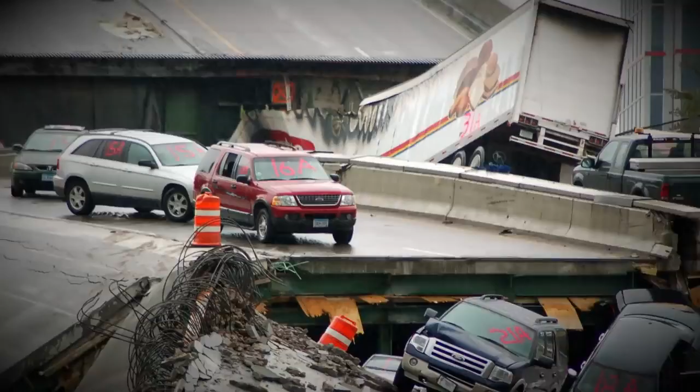Today we're covering the Mississippi Bridge collapse, and as such I'm going to rate it here 6 on my disaster scale, and again here 6 on my historical legacy scale.

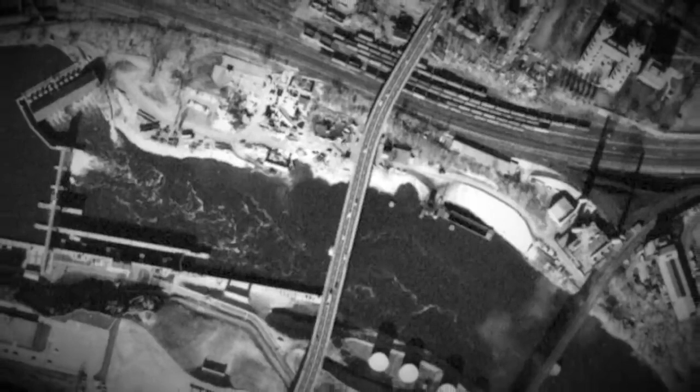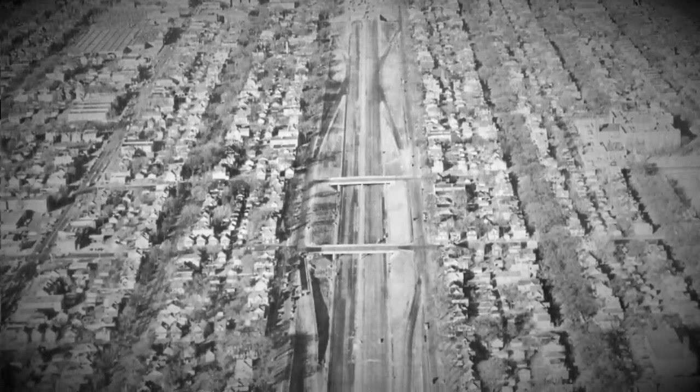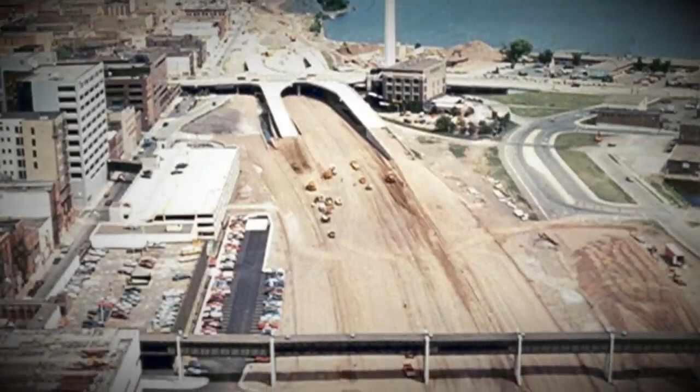In the early 1960s, plans were drawn up to cross the Mississippi River as part of the colossal construction of the I-35, a monumental 1,569-mile north-south cross-country interstate highway project. Parts of what would become the I-35 had been constructed pre-1956, the date on which the interstate system was formed in the US. The route would eventually be completed in 1982, and it ran from Minnesota in the north all the way down to Texas in the south.

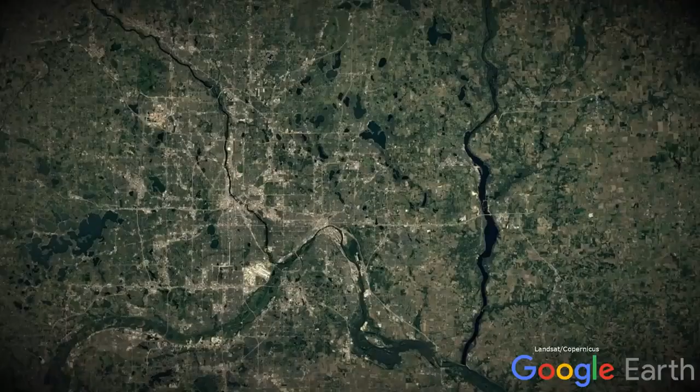And part of the route would have to travel through Minneapolis, necessitating the crossing of the Mississippi River. As a side, the I-35 in the region actually splits into 2, the I-35 West and the I-35 East. This allowed the highway to be brought into Minneapolis and St. Paul respectively. Both branches rejoined in Columbus. In 1962, plans were begun to be put on paper on the I-35 West River crossing.

As part of the design process, engineering firm Sverdrup and Parcel were hired on to produce a preliminary engineering report, create final design plans, checked by a registered professional engineer, and check design computations. On the 12th of April 1963, 2 options were presented to the Minnesota Department of Transport, a 4 and a 2 truss design. Sverdrup and Parcel recommended the latter for economic reasons, which was the option selected by the department.

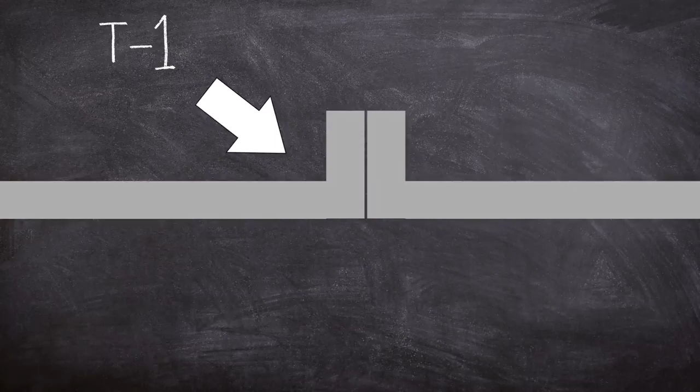The accompanying report from Sverdrup and Parcel stated welding is planned throughout for the makeup of girders and truss members, and, in this connection, high yield strength steel conforming to T1 will be used extensively. They also commented that the use of welding compared to riveting would save the department money, but in reality the use of T1 steel had an overall cost implication. By September, both Minnesota Department of Transport and the Federal Highways Administration began to express reservations about using such large quantities of T1 steel in the bridge.

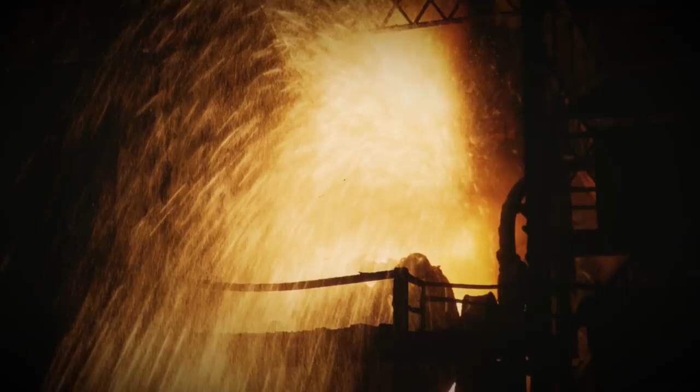You see, T1 is a very strong construction material, but this comes with a drawback: the way it is heat treated. And as such, members made of T1 are limited by the size of the heat treatment facilities where they are produced. This meant that there would be a need for more joints, which incurred extra cost during construction. Not only that, but the material was more expensive compared to other steel types at the time. T1 was 38 cents per pound, compared to the weaker A441 steel that was around 31 cents per pound, and could be made in longer sections due to the different heat treatment processes.

During the March 1964 conference, Minnesota Department of Transport and the Federal Highways Administration decided that Sverdrup and Parcel eliminate T1 steel from all main truss members and use A441 and A242 steels instead. This required a redesign, as the A441 and A242 steel had a capacity of 27,000 pounds per square inch versus 45,000 pounds per square inch for T1. Due to the weaker steel, the design had to be replanned and required thicker steel, which in turn added more deadweight to the structure.

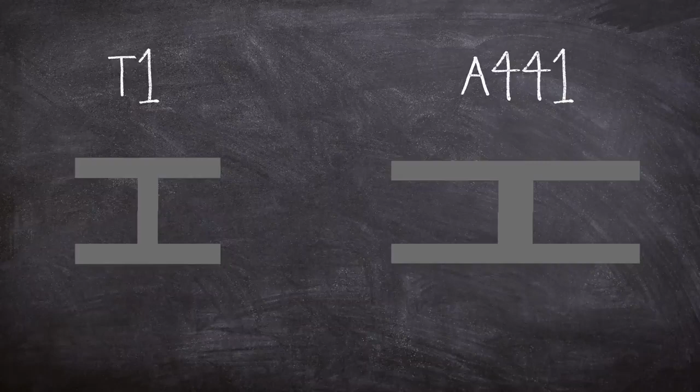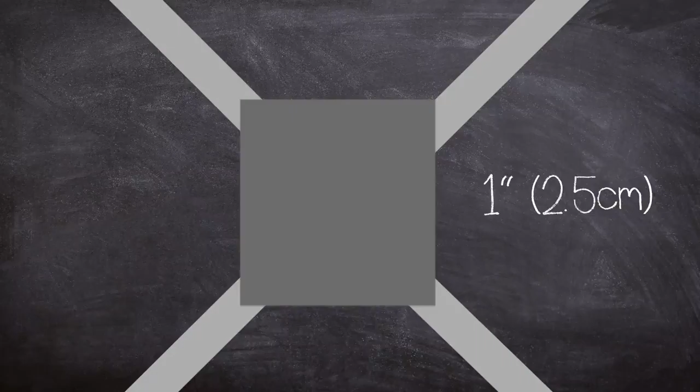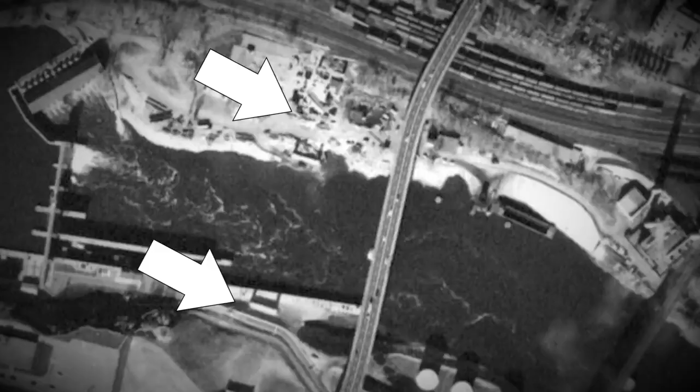However, some of the original 0.5-inch T1 steel gussets weren't thickened when the change to weaker steel was employed. The ones that were improved in the final design were up to 1 inch thick, and it might be worthwhile remembering this for later on. The final design was settled upon by March 1965. However, initial works to build the piers had already started in 1964. Let's first look at the actual design accepted.

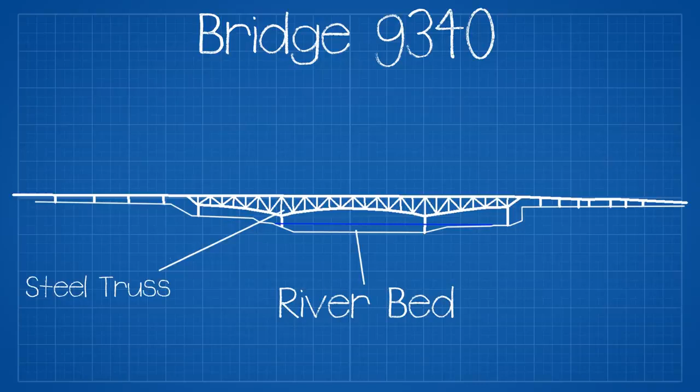The structure used welded built-up steel beams for girders and truss members, with riveted and bolted connections. The bridge was 1,907 feet long and carried 8 lanes of traffic, 4 northbound and 4 southbound. The bridge had 13 reinforced concrete piers and 14 spans, numbered south to north.

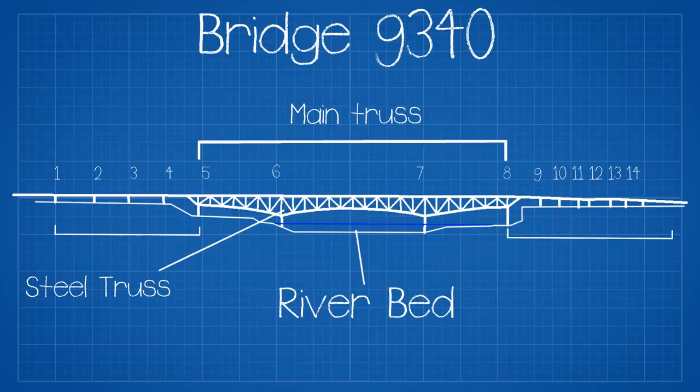11 of the 14 spans were approach spans to the deck truss portion, which was only 3 spans long but was over 1,000 feet in length. The bridge deck in the approach spans was supported by continuous welded steel plate girders or by continuous voided slab construction. The 3 main spans used deck truss construction, consisting of 2 reinforced concrete deck slabs separated by about 6 inches, with a total width of the deck slabs of about 113 feet 4 inches. This was enough to accommodate all 8 lanes of traffic.

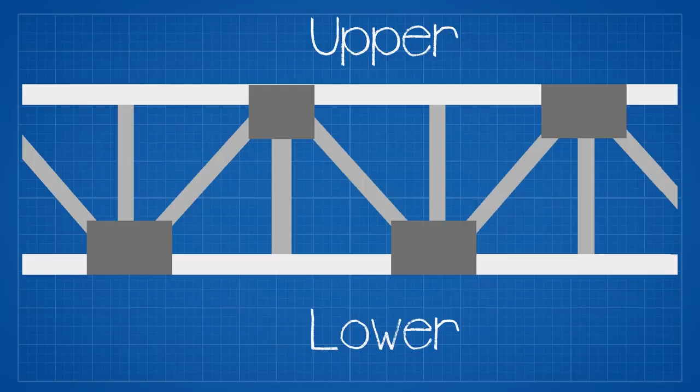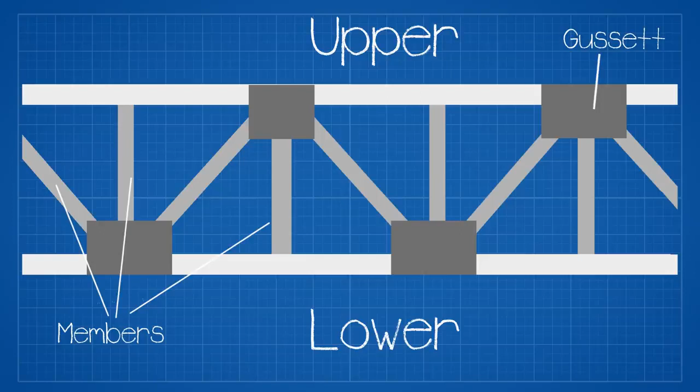The main trusses comprised 2 parallel main sections. This was made up of upper and lower chords that extended the length of the deck truss portion of the bridge. For added strength, the chords were connected by straight, vertical and diagonal members. To connect these together at each junction, gusset plates were installed and riveted together. These were made of steel. To connect the east and west trusses, bracing members were utilised.

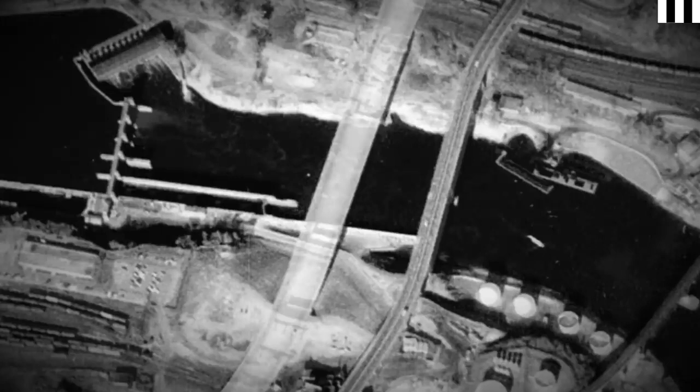Construction was completed in 1967 and opened to traffic, and for 10 years or so all seemed well, until it reached its first renovation in 1977. Back in 1967, when the bridge was initially constructed, it had 1.5 inches of concrete over the uncoated top reinforcing bars of the bridge deck. This was pretty standard for the time, but by the 1970s a number of similar structures were experiencing rebar corrosion.

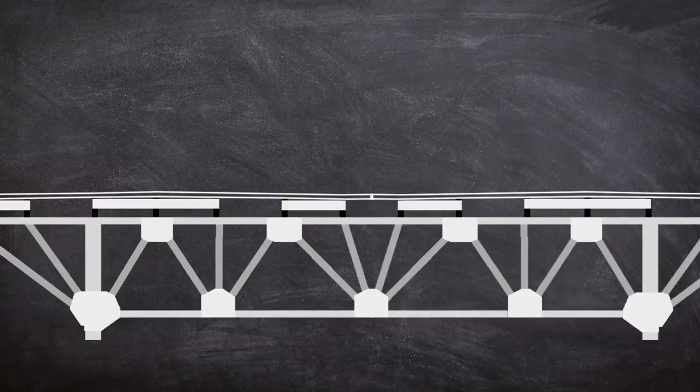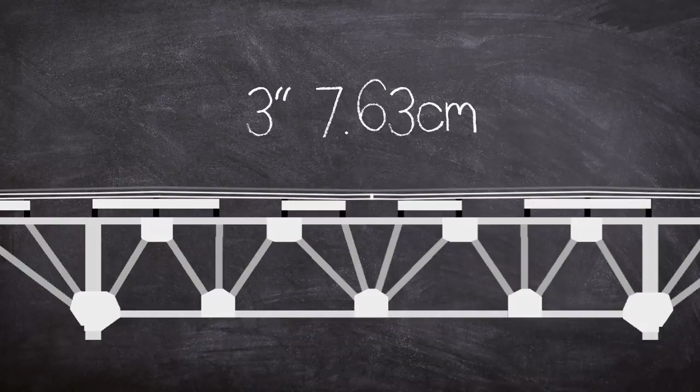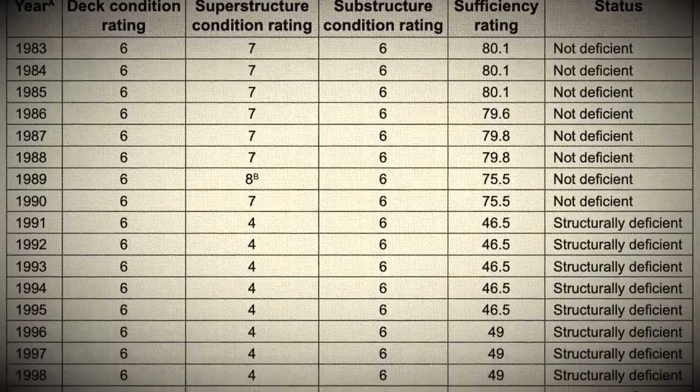In order to combat this, a thicker layer of concrete was poured on top of the bridge, bringing the total thickness to 3 inches. But this came with an issue, and that was the increase in weight on the truss structure, in the region of roughly 3 million pounds or 13.4%. All throughout the bridge's life, the structure received an annual inspection, starting in 1971. Part of these inspections were a general condition and evaluation report, but after 1991, the results took a nosedive.

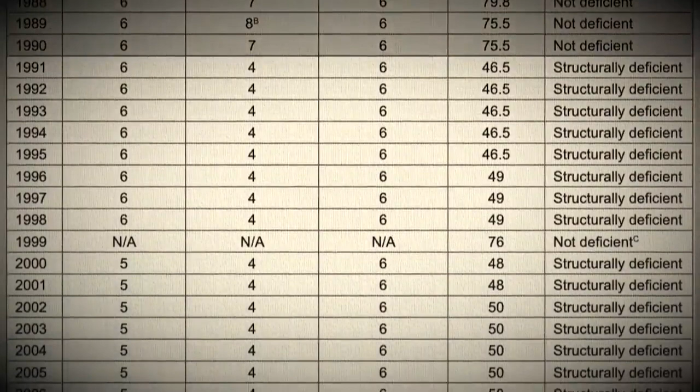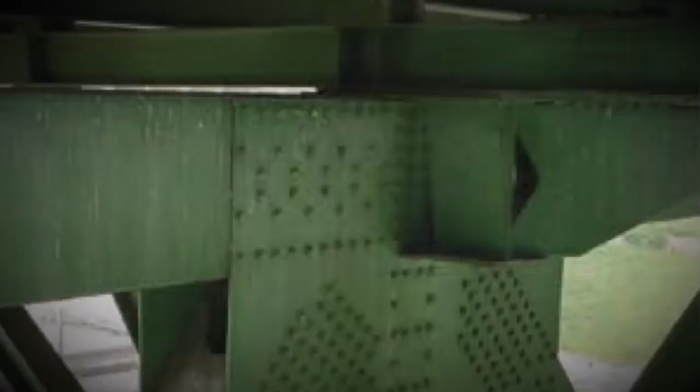As part of the annual survey, the bridge is given a status, and at the start of the 1990s, it received an unsatisfactory structural deficiency rating. A status does not indicate that a bridge is unsafe, but only that the structure is in need of maintenance, repair or eventual rehabilitation, and as such, a weight restriction is given. However, in 1993, some gusset plates had experienced corrosion.

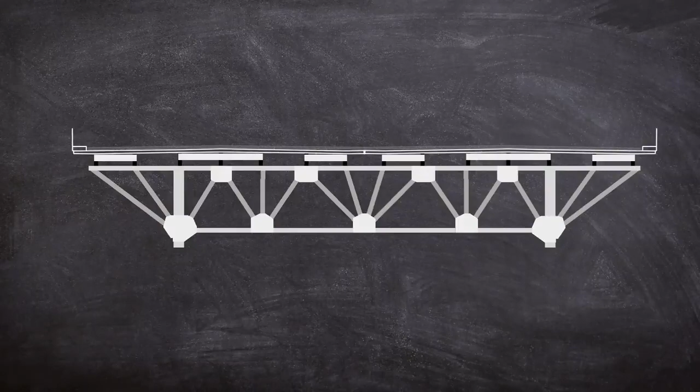In 1998, another refurbishment project was underway at the bridge. This involved improving several features, including the central barrier and outside traffic railings, which did not meet the then safety standards. And like in 1977, the permanent changes increased the dead load on the bridge by about 1.13 million pounds, or 6.1%. In the early 2000s, cracking was discovered and was drilled out and reinforced, and a process of 6-monthly inspections was enacted. And this brings us to the bridge's final renovation, leading to 4 of the 8 lanes being closed on the I-35W bridge.

The 2007 renovation involved removing some of the concrete and adding a 2-inch thick concrete overlay on the deck. Part of the construction works involved staging materials on the bridge, ready for use. This increased the static load by roughly 578,000 pounds, right over one of the 0.5-inch thin gusset plates. During the works, throughout July, the staging of materials was not raised as a concern, and as such, for each surface pour, tons of sand, rock and water were stored right over some of the most vulnerable portions of the bridge.

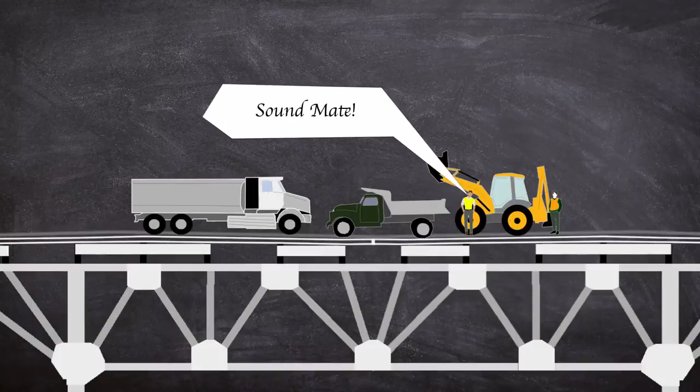On the afternoon of August the 1st, 2007, the contractors working on the bridge were preparing to pour a 530-foot overlay in the southbound inside lanes. The pour was set to be undertaken at 7 p.m. due to the hot summer sunshine, and in the lead up to this, large amounts of materials were stored on the bridge, and 2 cement tankers fully loaded at 80,000 pounds were parked over Pier 6 and the weakened gusset plates. To add more weight to the bridge from the concrete pour, the busy evening rush hour traffic crawled its way over the open lanes, further concentrating the weight on the structure. The inevitable would happen at 6:05 p.m.

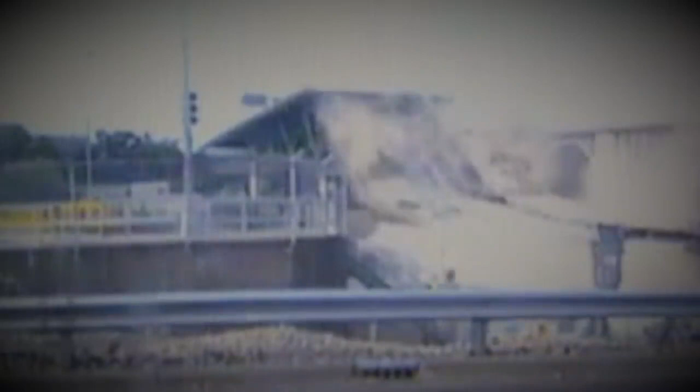The central span of the bridge suddenly gave way, followed by the next spans. The structure and deck collapsed into the river and onto the riverbanks below. There was a motion control security camera, and this captured the dramatic and fatal moment of the structure's failure.

There were 111 vehicles on the bridge when it collapsed, and this included public as well as personal vehicles. Many were plunged into the river, the banks, and the rail yard below the span of the bridge. The first call from 911 dispatch went out at 6:07 p.m.

And at 6:08 p.m. Minneapolis 911 dispatch made a distress call requesting that all available emergency assistance personnel attend the scene. Many of the first people involved on the scene were locals and others stuck in traffic. Just 5 minutes after the collapse, police were on scene and began to coordinate the rescue efforts.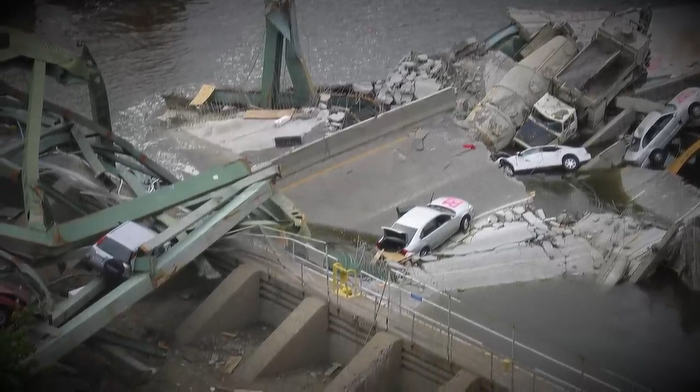Within an hour of the collapse, 12 public safety agencies responded with 28 watercraft to assist with the river rescue operations, helping to recover many victims from the Mississippi River. Some sections of the roadway were resting on top of the river, leading to the occupants of some of the vehicles being stranded, necessitating 93 being rescued from various precarious situations.

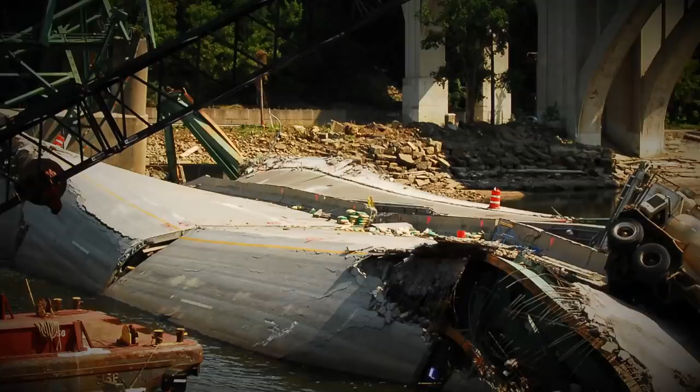In the summer evening, many lined the banks of the river to watch the unfolding dramatic rescue efforts launched by the first responders. By 7 p.m., the rescue efforts started to move towards search and recovery as the submerged vehicles needed to be identified. By the next morning, many were still unaccounted for, and as such, the river was lowered by 2 feet by the Ford Dam downstream. It would take 3 weeks for the final body to be removed from the wreckage site.

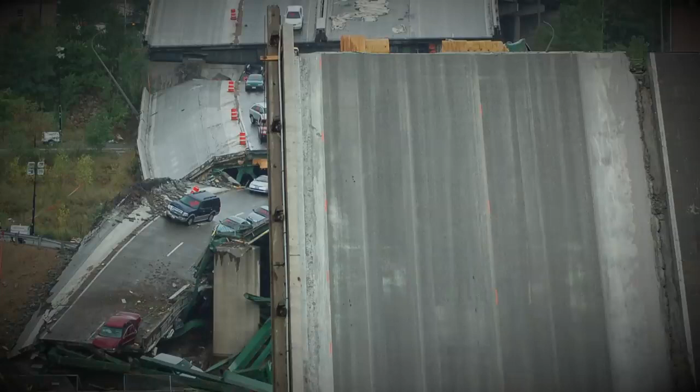The collapse had a total of 190 casualties, 34 of whom were seriously injured and 13 would be killed. On the 6th of August, the United States House of Representatives and the United States Senate each voted unanimously to secure $250 million in emergency funding for the state of Minnesota. With traffic now rerouted away from the bridge site, many dead and millions of dollars worth of damage, the NTSB set out to find the reason for such a dramatic and sudden structural failure.

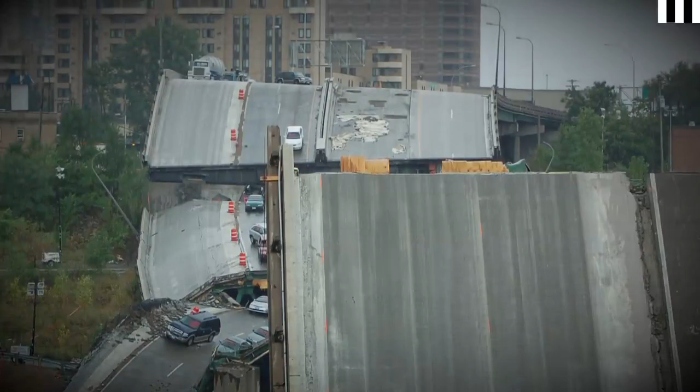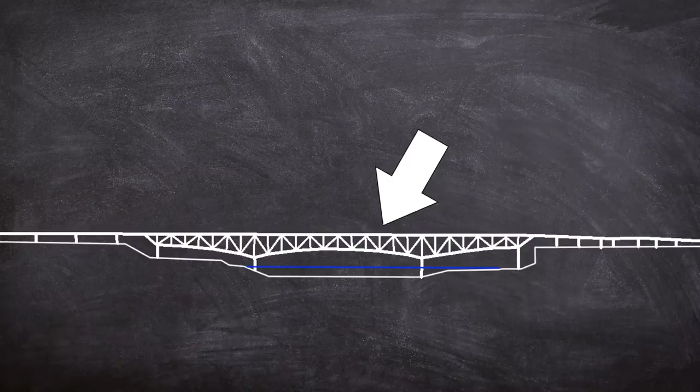Every piece of the structure that was recovered underwent scrutiny. Investigators found that gusset plates at the upper node 10 had fractured. The fractured gusset plates, coupled with fractures in the lower chord members between L9 and L10 nodes, resulted in completely separating the main trusses in this area, thereby allowing the centre span to drop. Analysis of the security camera footage showed that failure had begun towards the southern end of the centre span, centred on the gusset plates and their material thickness.

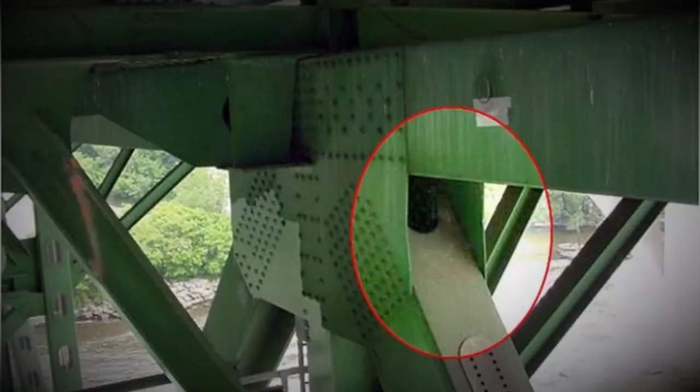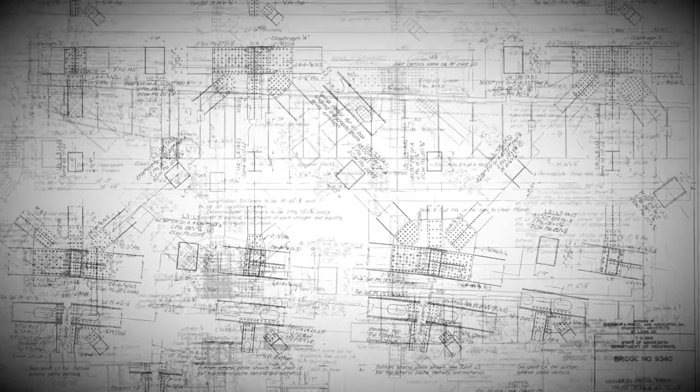And the NTSB concluded that some had inadequate capacity for the expected loads on the structure, which was further compounded by the increased weight during the 1977, 1998 and 2007 refurbishments. Ultimately, the NTSB report, released in 2008, concluded, due to a design error by Sverdrup and Parcel and Associates of the gusset plates at the U10 nodes, which failed under a combination of substantial increases in the weight of the bridge, which resulted from previous bridge modifications.

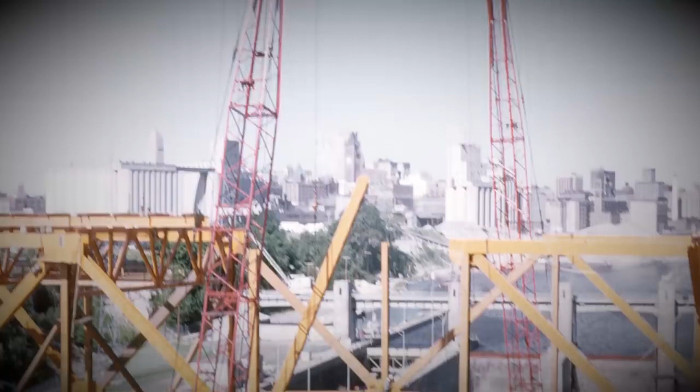Sverdrup and Parcel received a great deal of blame, along with the state transport officials, for giving inadequate attention to the gusset plates during inspections. Needless to say, the financial implications went beyond the recovery and cleanup for the state. On the 2nd of May 2008, a $38 million agreement to compensate victims of the bridge collapse was settled.

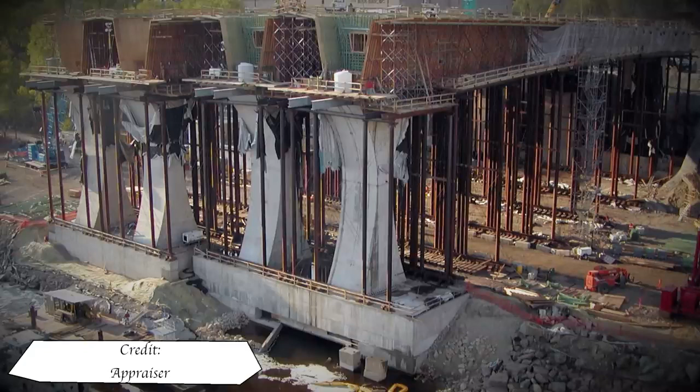Another $52.8 million was received by the victims from URS Corporation and Jacobs Engineering Group, the successor of Sverdrup and Parcel. They also agreed to pay the state $8.9 million in an out-of-court settlement. The bridge would be replaced and opened on the 18th of September 2008.